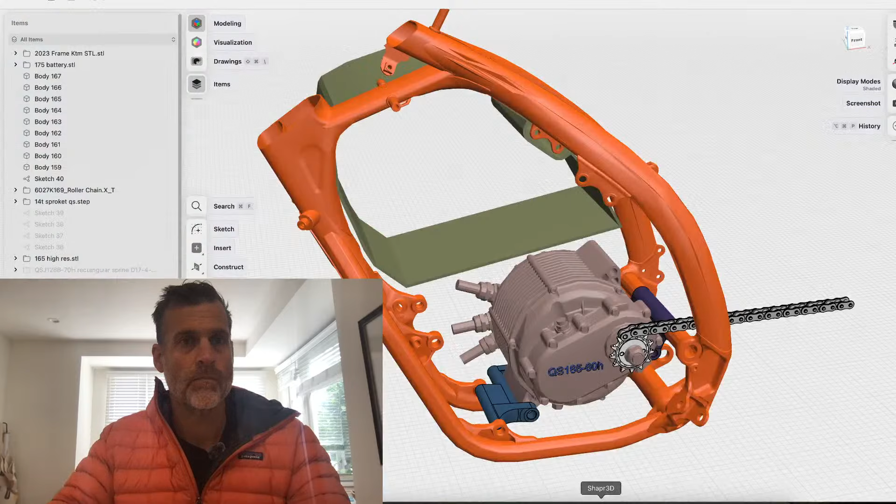So in this video, we're going to quickly go over a few things here. One is how to decide which motor is going to be good for your frame. And there's quite a few motors available out there. So let's go find...

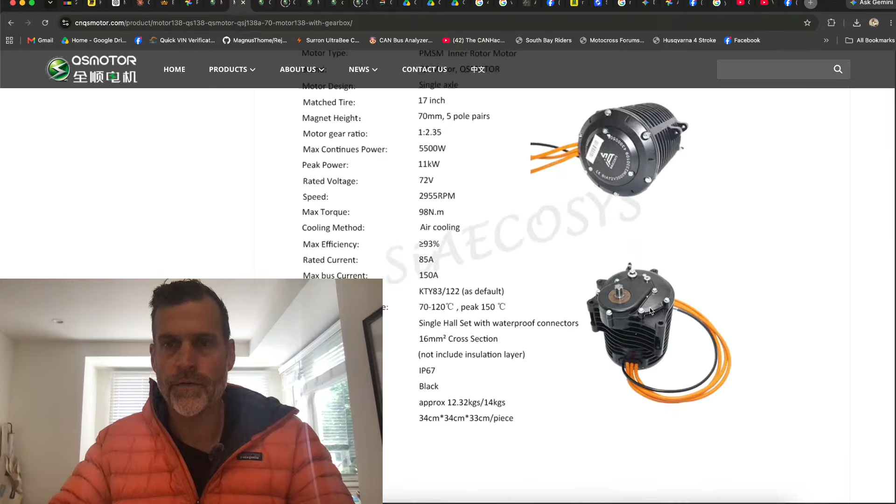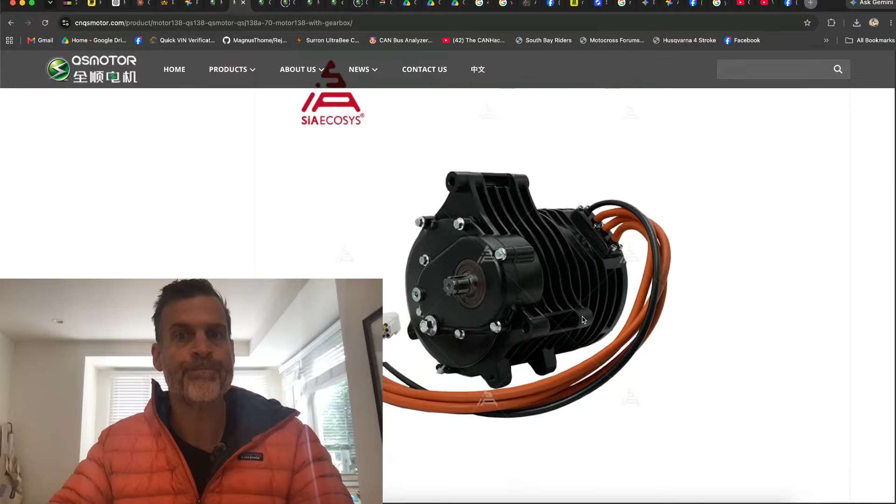So we're all used to this motor right here. This is going in damn near every electric motorcycle over the past 5 years. I can push 30 kilowatts for just a few seconds until it doesn't need to accelerate anymore, then it sticks at 20. Technically, if you overgeared it and went up a really steep hill, sure. At a motocross track, this thing works good, feels like a 125, falls on its face after 35 miles an hour. That's fine, but the problem is it gets really hot.

It is air cooled. It's about 12 kilograms. Do the conversion for that, 20-something pounds.

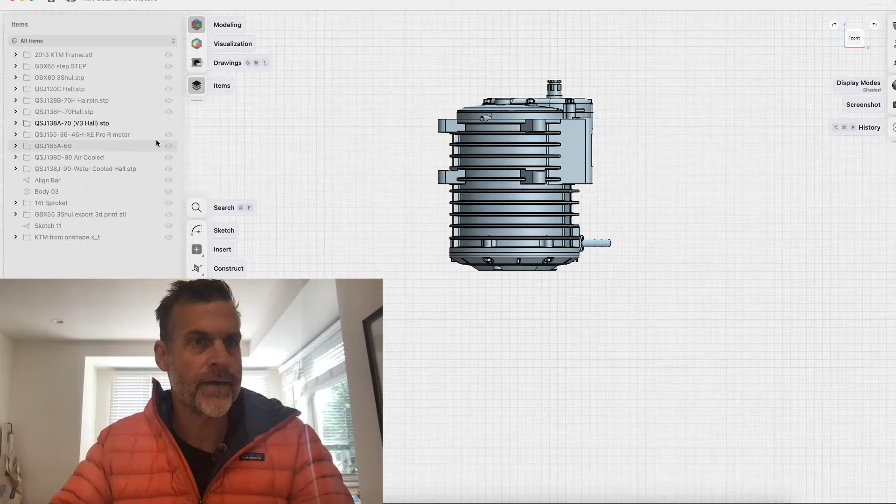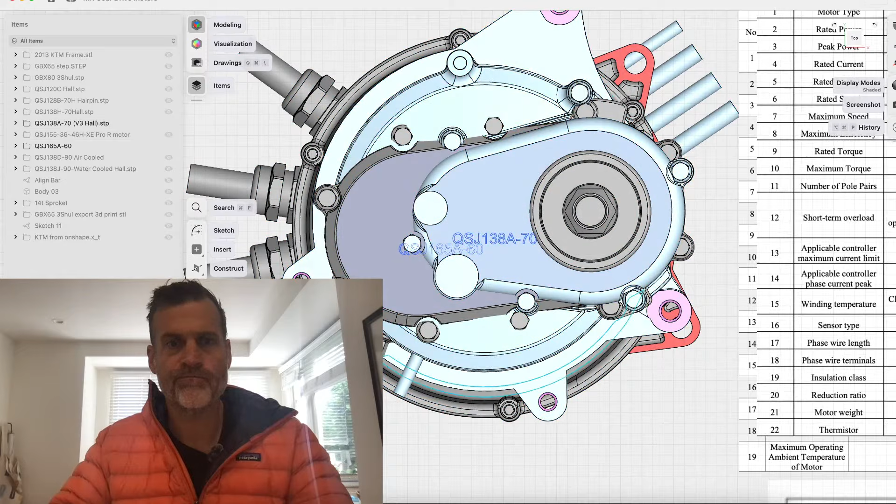So I'm going to give you a comparison now to a newer motor, the QS165. I'm going to overlay that here. As you see, it's a little bit bigger. Well, not a little, a lot. So 138, 165. Let's look at that from above. 138, 165. Darn near the same. The 165 is a little bit larger in diameter here. However, you can find ways to creatively bring it down closer to the frame in some cases.

At the end of the day, this 165 can do 40 kilowatts versus 30. It's rated for 12 versus being rated for 5. The weight, you add a few more pounds, there's more copper in there, more laminations on the stator. They also went with a larger diameter 20 millimeter shaft.

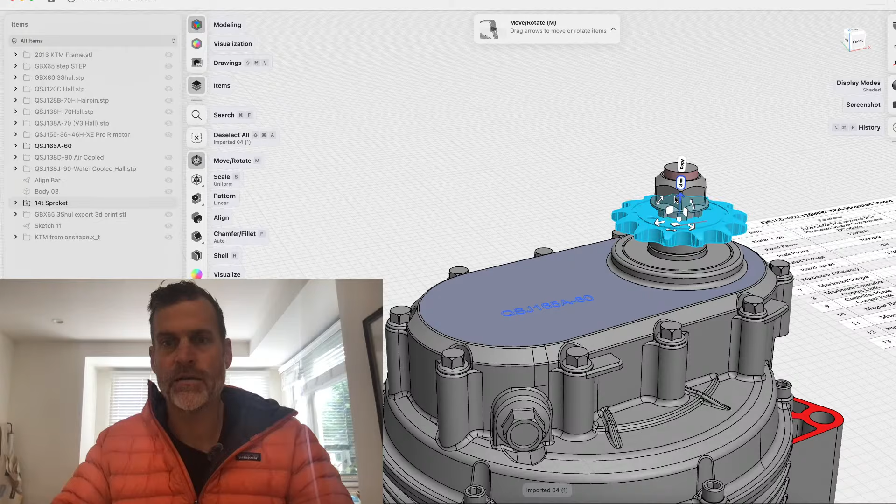This spacer right here, well, I can't move it up and down because this is one solid file. This spacer can be moved up or down. The sprocket can come up a little bit or down a little bit. It's up to you if you want to screw around with that. It's a standard spline sprocket. You can buy it from them in a 428 or a 520 pitch.

It's up to you. You can buy a Yamaha one on Amazon. There's other people that sell them. So here's the specs for that. I won't bore you with all the specs. We mainly just want to see the size here.

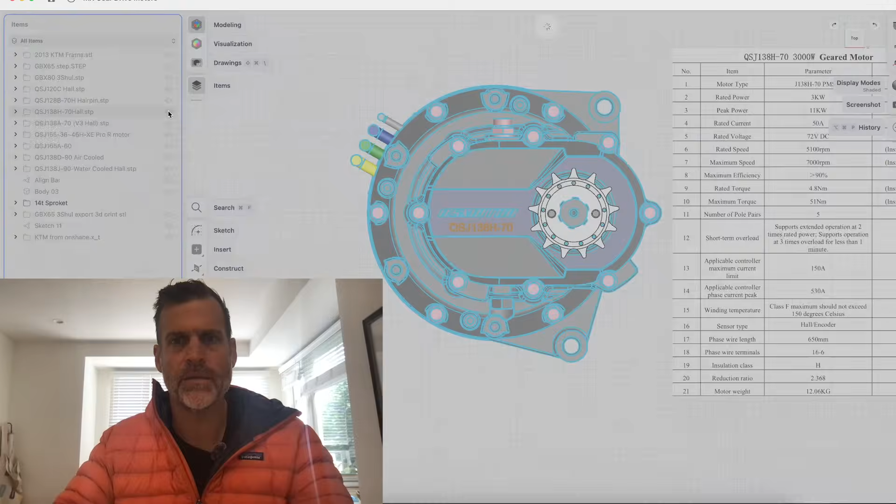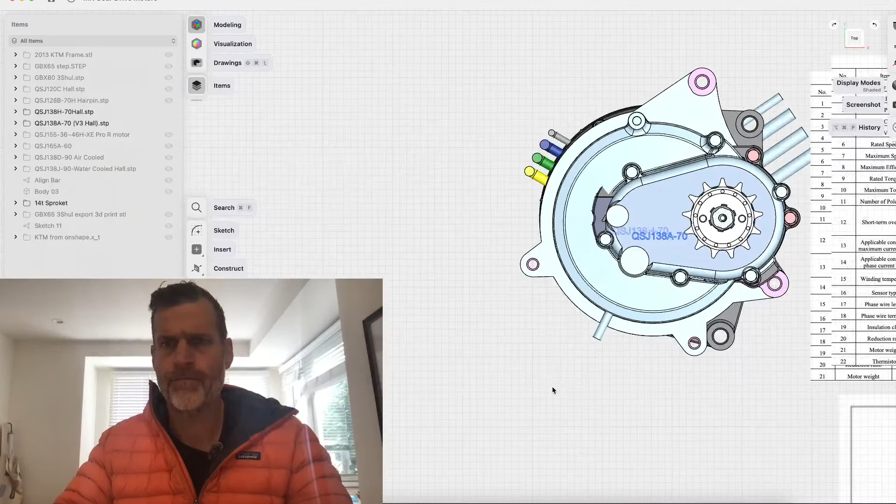So next I'm going to go in and talk about why, I'm not quite sure why no one is using this designation model here. The H, I kind of like this one. It's been out for a while. Russia market seems to really like it. USA market, for whatever reason, chose this one. Same specs. This is the same exact motor on the inside, same gear ratio, same spline, different mounting patterns, and different phase wire outputs. So interesting motor. I wish more people were using it.

So I'd love to see some people build with this. Maybe because it doesn't have a mount up here to the front, that you had to find a way to use it in the back. Perhaps that's why.

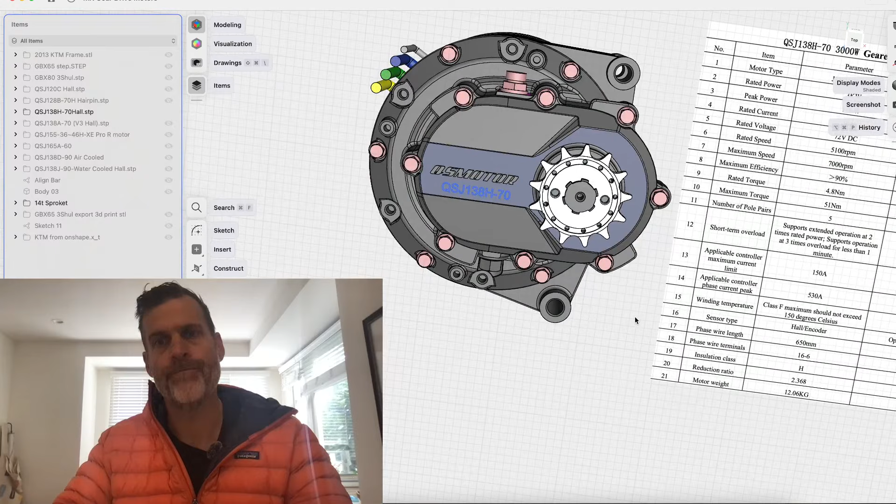But all right, let's go with the next. So I'm going to consistently keep the tried and true most popular one out here from a top view. Actually, let's go to how it's mounted in a frame. So typically this is how you'll see it mounted in a frame.

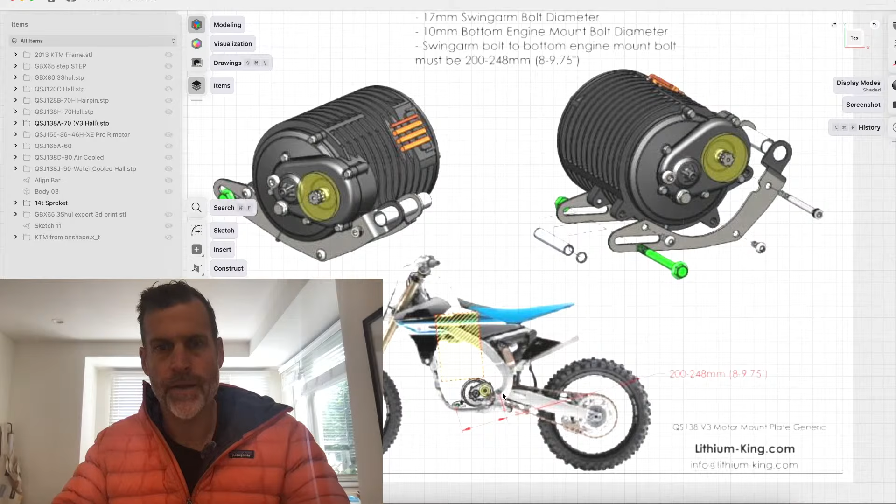It's a bad photo, I'll get you a better photo shortly. But it goes through the swing arm bolt right here to right there. You'll have to use spacers. KTM is 17, I believe Yamaha is 18. Then the front, you have to figure out a way to screw down. Sometimes you have to drill out the stainless steel. This is Lithium King, he makes these for everything, all the popular ones. Let's find his version for the 165.

Hello? There she is. So,

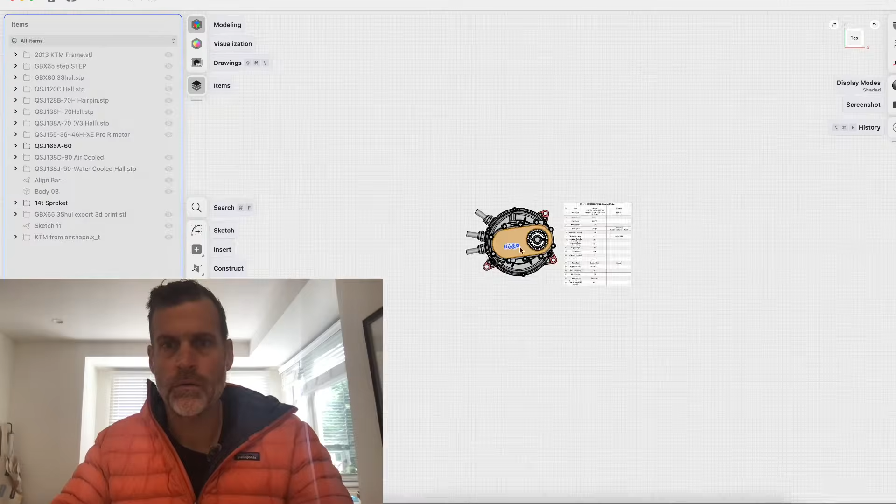I'm not sure, maybe I didn't add the image, so let's add it right now. 165 mount. Here we go, 222.

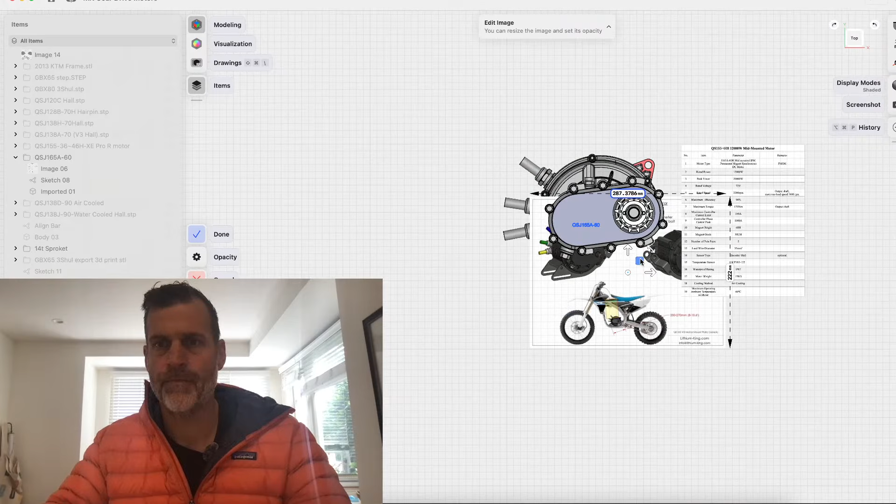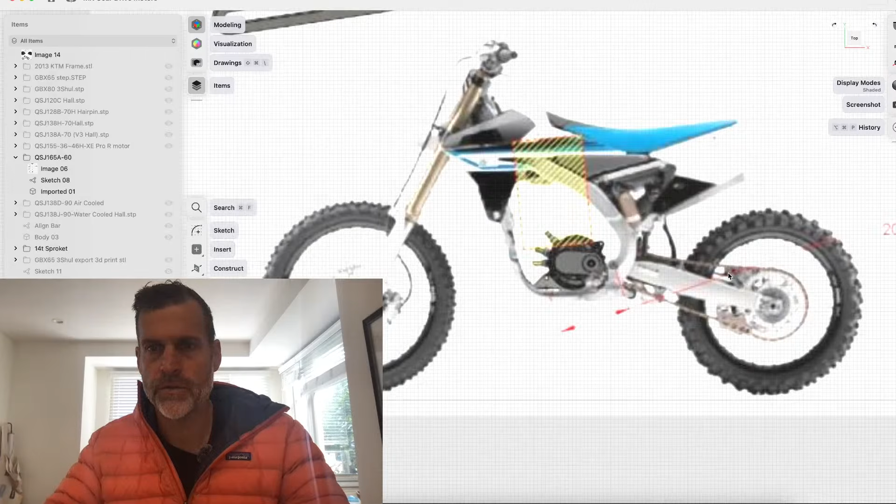Same thing, I don't think Lithium King likes giving big photos because they don't want people to steal their intellectual property and make renderings and cut their own. But same thing, swing arm bolt goes through here and you figure out how to mount the front. All right, on to the next.

So 138, goodbye. Oh my goodness, come on.

There we go, so 138, now let's overlay the new motors from 3Shul. These things are absolutely blistering, crazy, way more powerful and heavier, tiny bit larger.

So let's start with their 65. This is gonna whoop this one all day long. In fact, a little bit shorter, not by much, but shorter. And then they have their larger 80. So let's show this one right here.

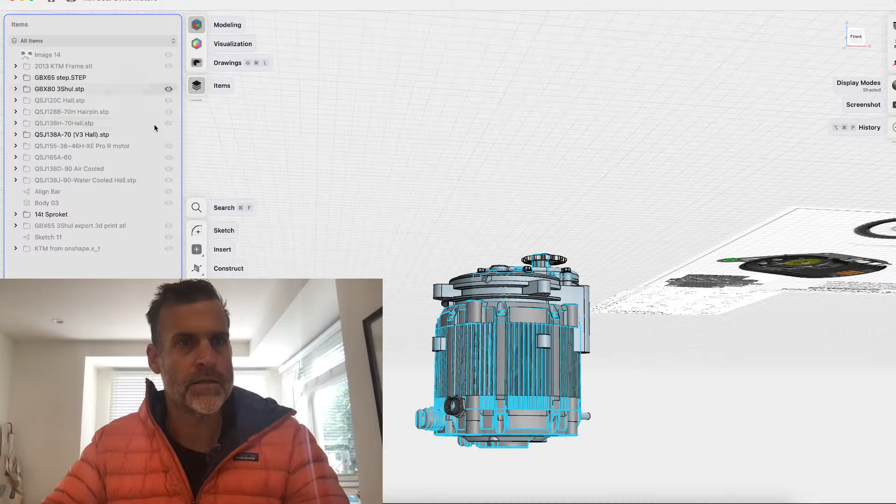So the 65 and the 80 are identical gearboxes, identical lamination sizes. There's just more laminations making it taller. So let's get rid of all that, I'm going to show you just the difference between them both.

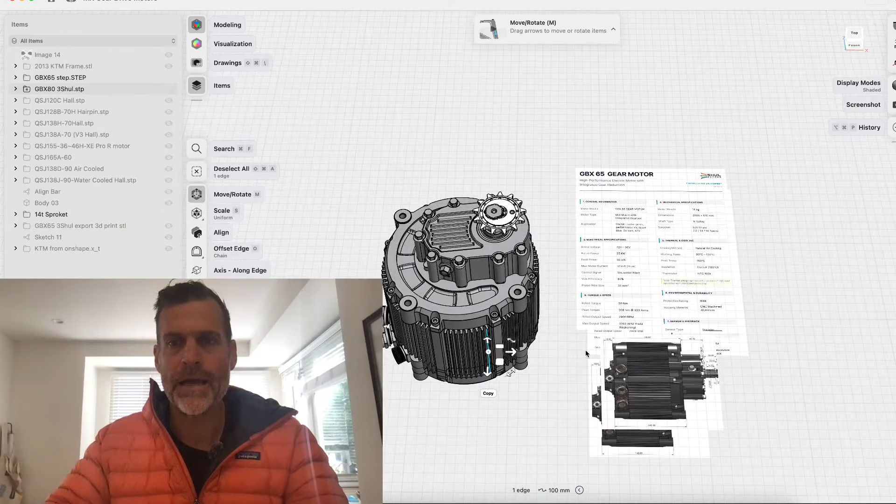Let's get a side view, perfect. So 65, 80, 65, 80. You see that extra little area between here and here? That is your extra length of laminations. More laminations mean more copper, more exciting power, and that's why they're able to give you some pretty insane specs on what they're able to do.

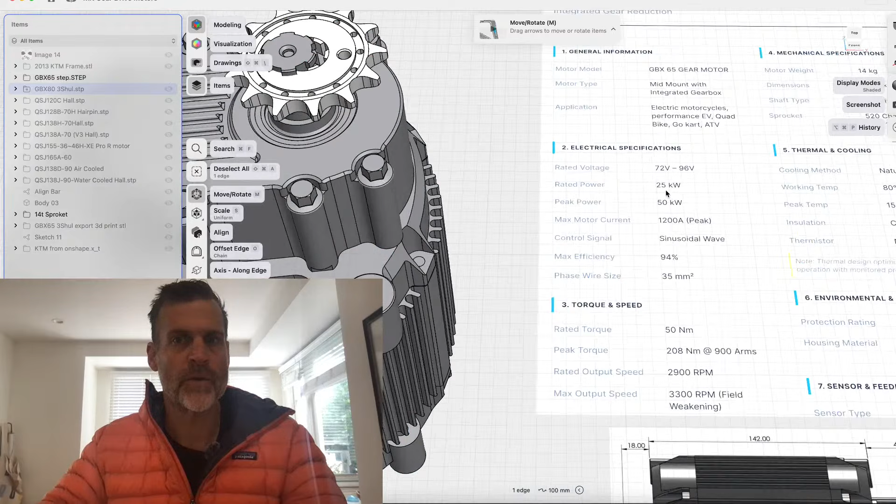Rated power 30 kilowatts, peak power 81. Who's doing 100 horsepower? Not me. I don't have a battery that big, but if you want to, cool. This would be a little more 450 power right here. 25 kilowatt, that's rated, that means it's good for a consistent 25 kilowatt, assuming you have cooling. 50 kilowatt, well over 60 horsepower, 70 horsepower, no problem.

They have their countershaft sprocket a little bit closer, which means you can push your motor closer to the frame. I like that, that's good. They don't have a bunch of weird mounting bungs sticking out in this area that get in the way of your frame and your swing arm pivot right here. You can still grind off a little bit if you want, if it gets in the way. Let me get rid of this sprocket real quick.

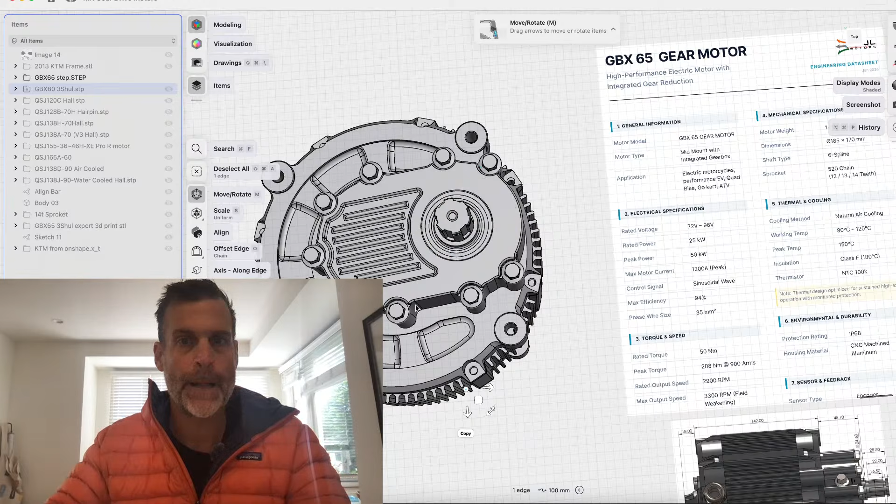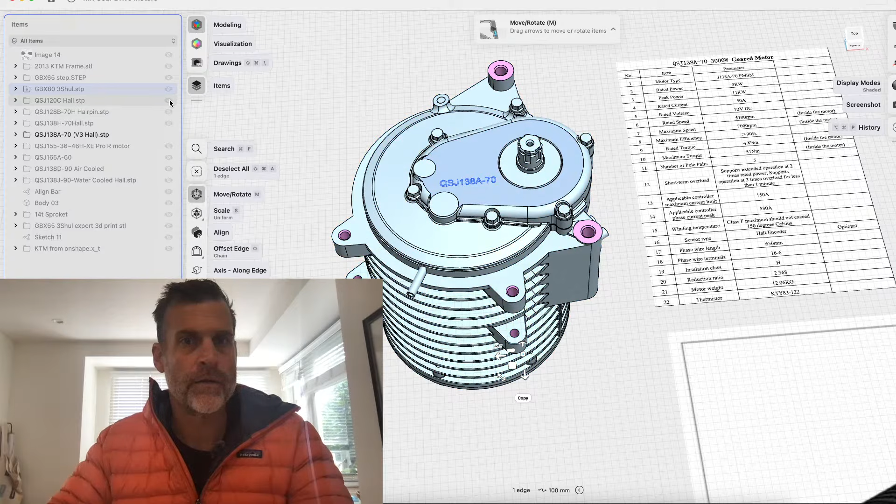All right, let's clear those out, go back to our baseline. All right, back to baseline, and for the fun of it, let's go to the 120 motor. This is what's on KTM 65 conversions, a lot of people use them.

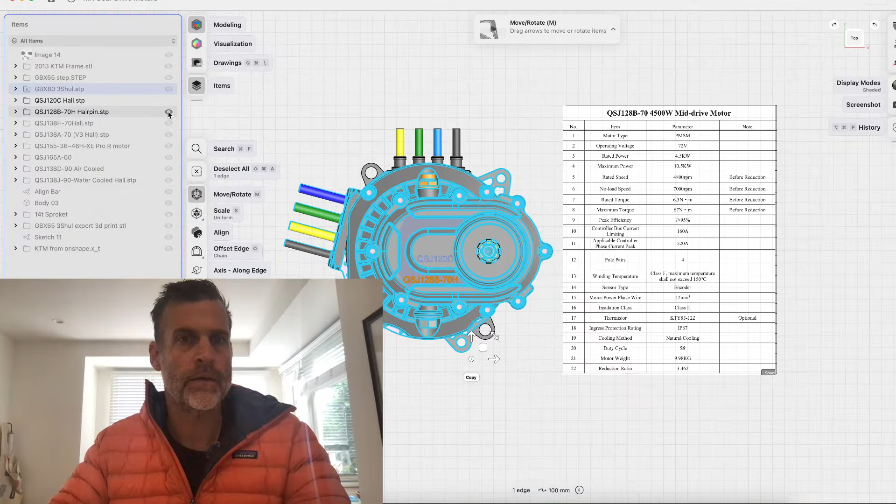Huge difference in size, this little guy is not rated for all that much, but it's just fun to see. However, look what they just made, a 128. So the 128 is the same gearbox style, however, the gear ratio changes significantly.

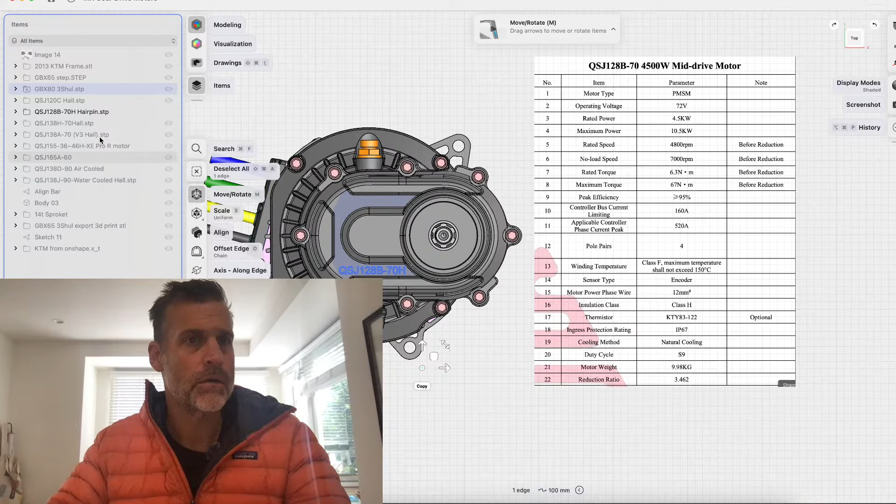Why they did that is kind of confusing to me. So these specs he just released to me, he said they're fine to show to all. Look at that gear ratio, 3.4 versus the standard 2.3 style.

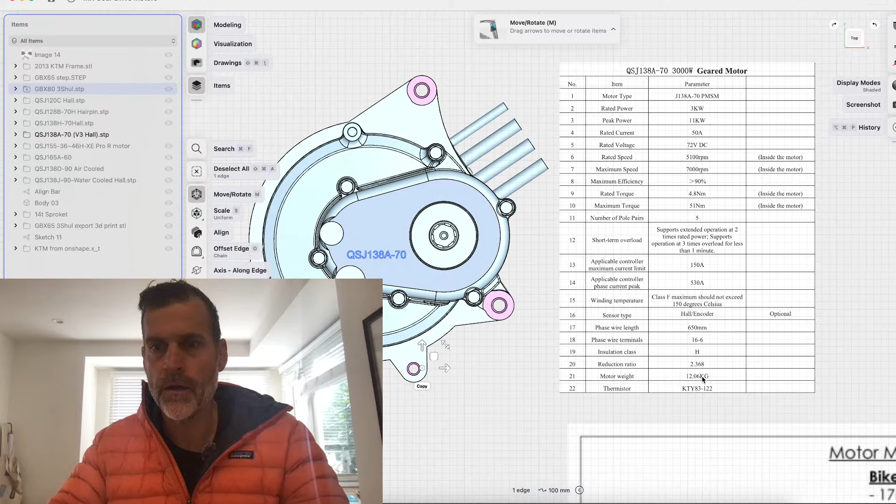So where's our gear ratio on this? I don't know if they list the gear ratio on this, but the RPM for this is basically the same as all the other QS motors. So we can just pick this one, which is 2.36. So the QS120, let's just pretend it has whatever gear ratio it does.

The 128, this thing's going to be a little powerhouse. This is a hairpin motor. Hairpin meaning it's got the goods to do. Where's hairpin? Here we go. So this is a hairpin motor.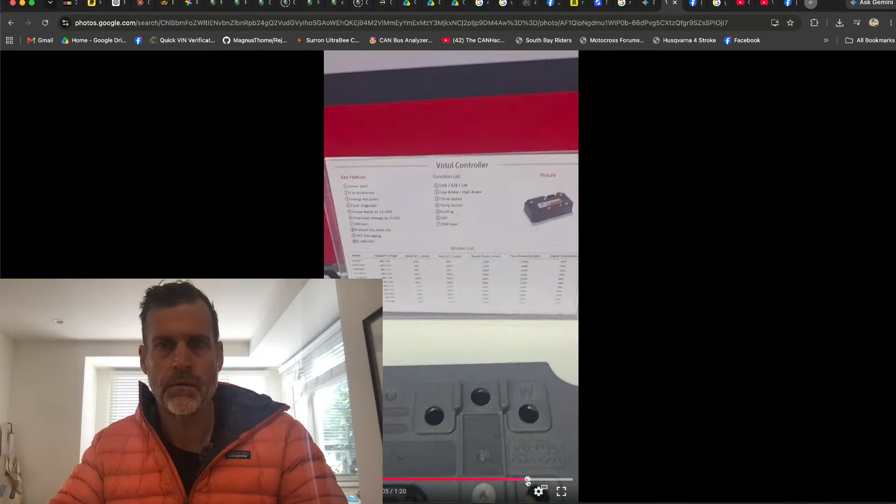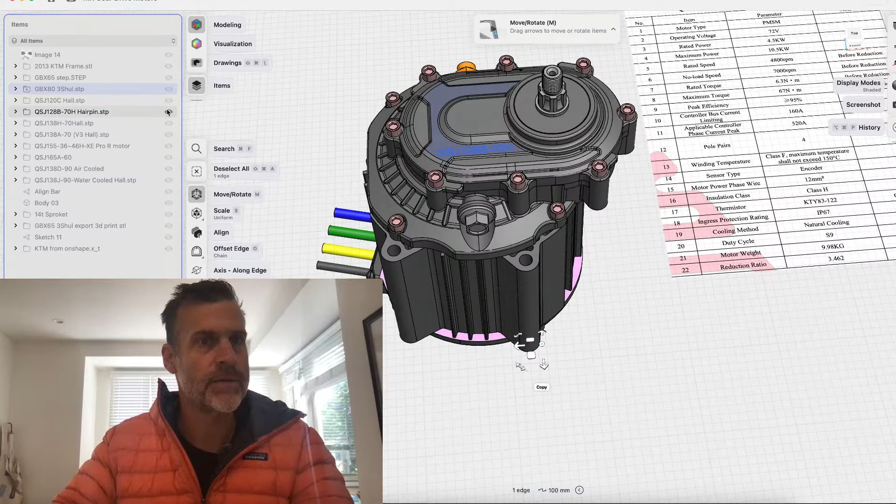But anyways, this thing's a hairpin, this thing is max 10 kilowatt, which means we'll probably be able to push 20 kilowatt. Super cool little motor, I'm actually going to try to put one of these in a full-size motocross bike. It's going to allow me to have some more room for the battery. Maybe it'll just be more of a trail bike. I'll see how it does on heat, limit it to 20 kilowatts and see what happens. So let's go back to baseline.

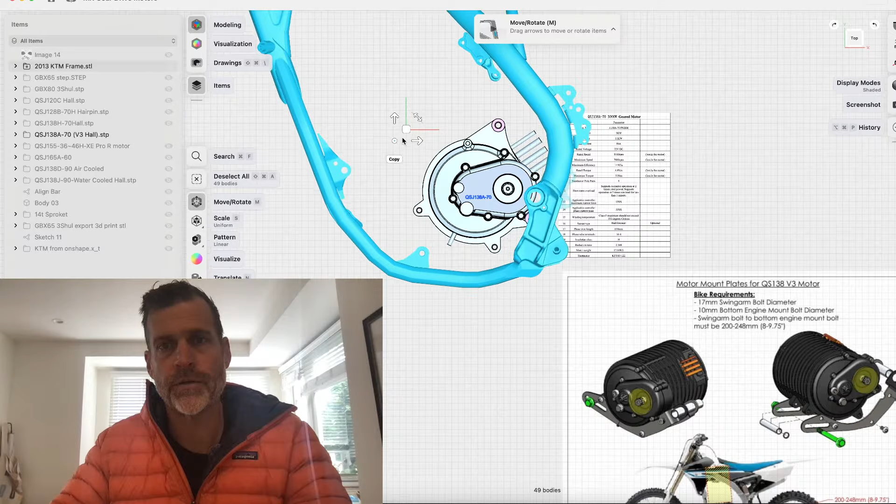So as far as mounting, what you want is to get this countershaft as close as possible to the swing arm pivot, not the motor being too low or too high, because that messes with your anti-squat. Typically what you should do is just prior to taking out your gas motor, make a template from here to here to here with some clear plexiglass or a piece of plywood, and just have a drywall screw going exactly where your original gas motor countershaft sprocket was. There's many other ways to do it. I use string or tape or whatever you want, or an old photo with some measurements.

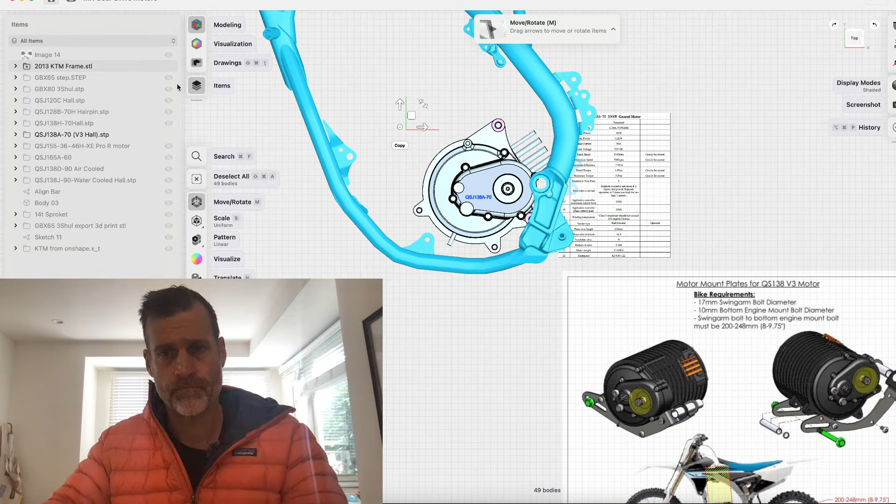Let me open an actual model with my frame scan. This is a 2023 frame, it's a 450. And I got two motors loaded in here. Well, while those are loading.

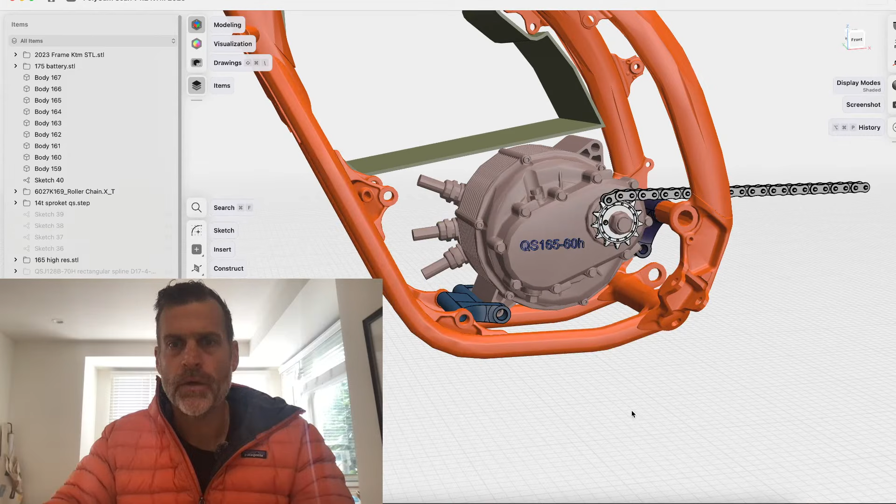This is loaded, so 2023 frame, this is with a 165 60H. These are some motor mounts I'm making here, you see in purple. The idea here is to just utilize the original frame members and tabs, so it's just literally direct bolt. This will be a 17 millimeter swing arm bolt, goes right through. This is a 12, this is a 12 I think, maybe a 10.

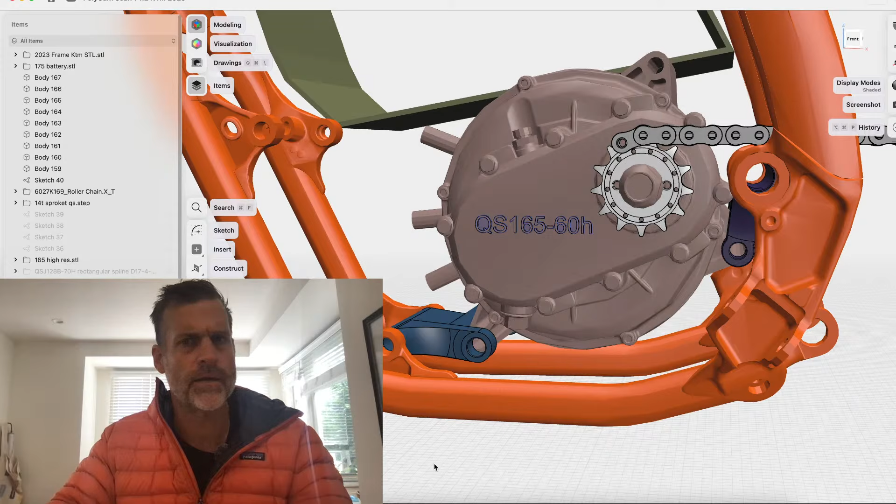Doesn't really matter, what's important is if you put your motor too low, then your chain will drag on the bottom of your swing arm. And that actually also affects, let's see if I have an anti-squat page still open, that also affects a lot of things like anti-squat. I'll put this link in the description.

So anti-squat, what you don't want is while giving power for your rear tire to lift up. On an off-road bike, if your countershaft sprocket's in the wrong place, you will put a lot of unnecessary load on your suspension. It's going to do some weird stuff, it's almost like if you've ever been late diving into braking bumps. Well, imagine you're just giving throttle and your shock is just bouncing up when it doesn't need to, or it's doing it more than it needs to. So just follow what you originally had. Your motorcycle manufacturer has been working on this hard for decades, so don't fix a good thing.

However, sometimes we can't fit these damn motors where we want to, so we have to deal with moving them around in different areas. Oops. Oh, come on, you little shit.

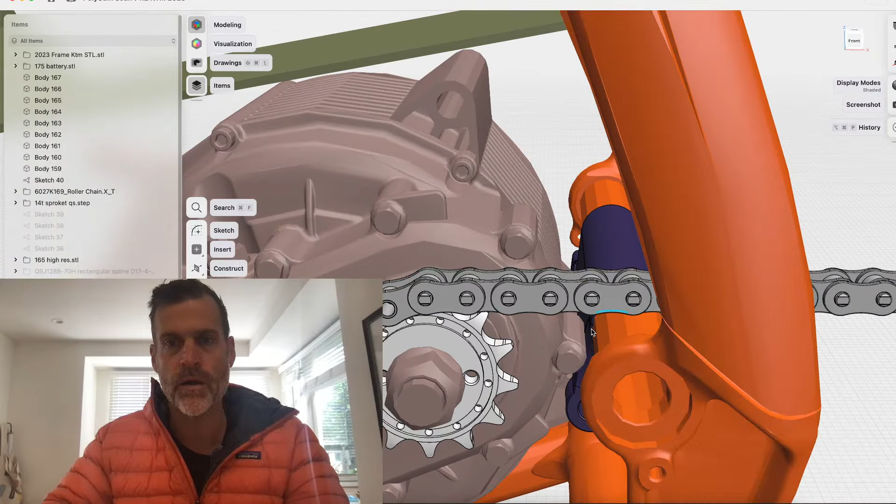What we have to deal with is the motors being in a weird area where we can't sometimes get it to where we want to go because this stupid bung is rubbing on this stupid thing. So in my model here, I have this motor way too close to the 17 millimeter shaft here because the swing arm actually comes out here, you got your needle bearings and all that. So this motor is technically too close, I do need to move it more this way. It's much too close, and that's my fault, I didn't 3D model a swing arm.

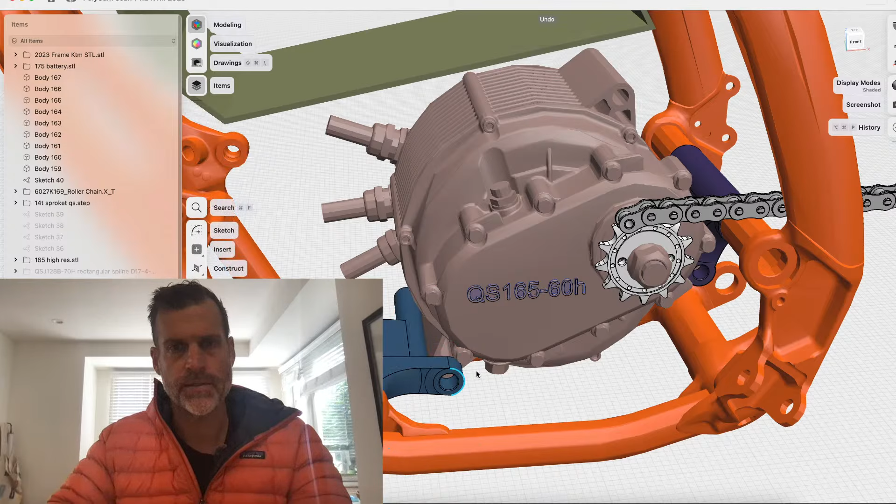So with that being said, these are motor mounts. I'm going to get these machined out of CNC aluminum, 6061. I've already done a mock-up, they work fine, this is just a bad 3D environment.

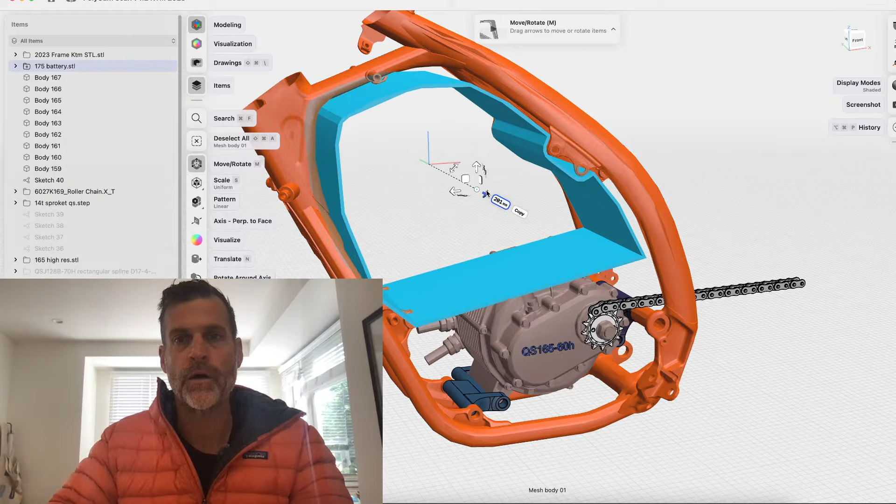Next thing, most people do cut these off and cut a portion of this off to fit a larger battery. We always want the biggest battery, but what we don't want is for it to stick out and rub on our knees, no one wants that. If you're an aggressive rider, that is the last thing you want. So generally speaking, you can fit 2 batteries wide here. This is about a 20 series 12P pack max you can fit in here, or a 26 series 9P pack.

That's using a pretty complex shape like this, which adds to the cost of the battery. You can just put a simple square in here, whatever you need.

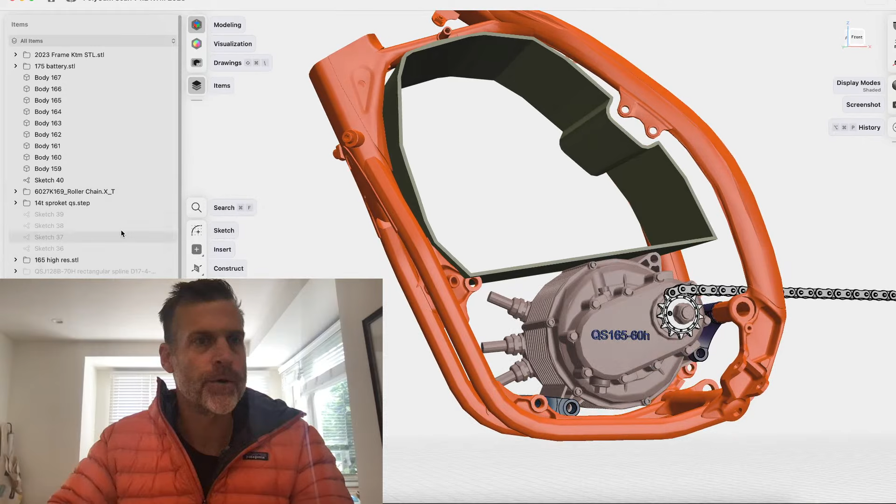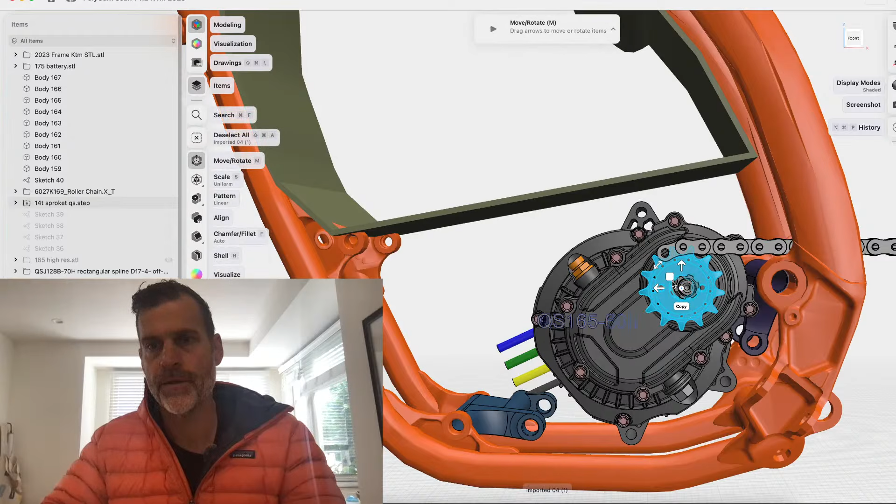So what I wanted to show you here is what happens if we put a different motor in. Let me get rid of this motor and try this one, just because I was curious. I really was hoping and want this motor to be something amazing. I'd be really excited if this thing ends up doing 22 kilowatts. Will it? I don't know. A hairpin motor doing 20 kilowatts when it's only rated for 5 is probably not going to be as resistant to heat as the others. But look at all the space we gain by the smaller motor.

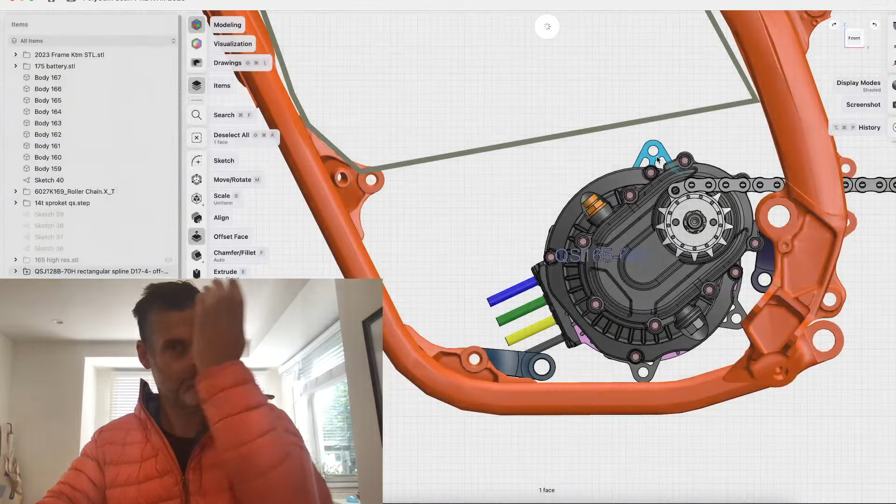I can chop this thing off here, but I can't chop it off here, I'll have to do something different. But I could chop this off here. Now look at the difference.

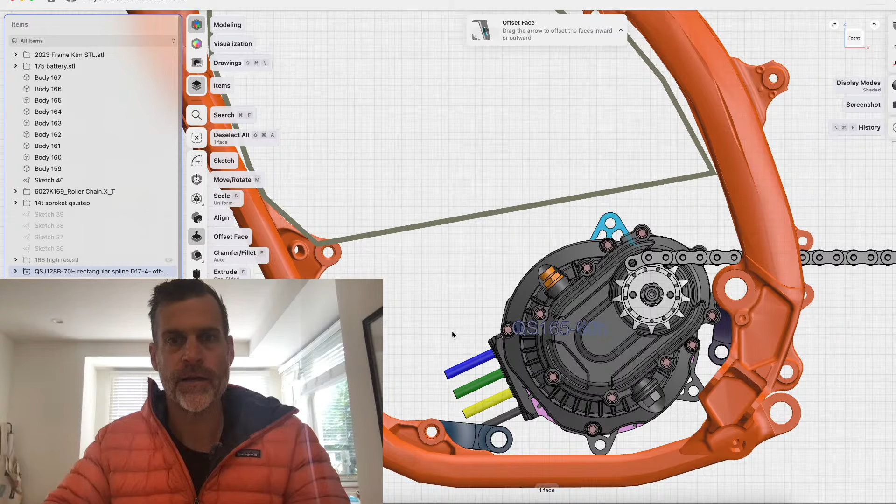That's a whole row of batteries I could fit right here: 1, 2, 3, 4, 5, 6, 7. And I want to fill up this area here with more batteries. Imagine all the batteries I get now.

I get to go down here, down here, down here, over here, and so forth. So all this extra space right here, this is an extra 7 miles of riding. So this is why space matters.

Plus this motor is 10 pounds lighter, so we save 10 pounds there. Maybe we end up making a smaller pack, like just a simple, cheap battery pack from one of the motor manufacturers. You can make an electric kit with a cheap motor, cheap battery pack, smaller controller, and end up 25 pounds lighter for a bike. You just have 2 of these battery packs, or maybe even a Surron Light Bee motor sitting around.

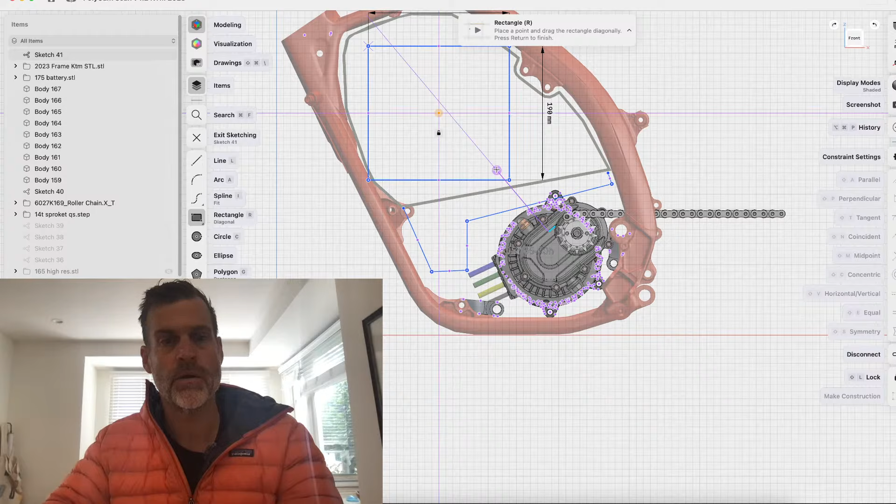The problem with this motor, however, is the RPM. The gear ratio is just bad, so you'll have to run 26 series, stuff like that.

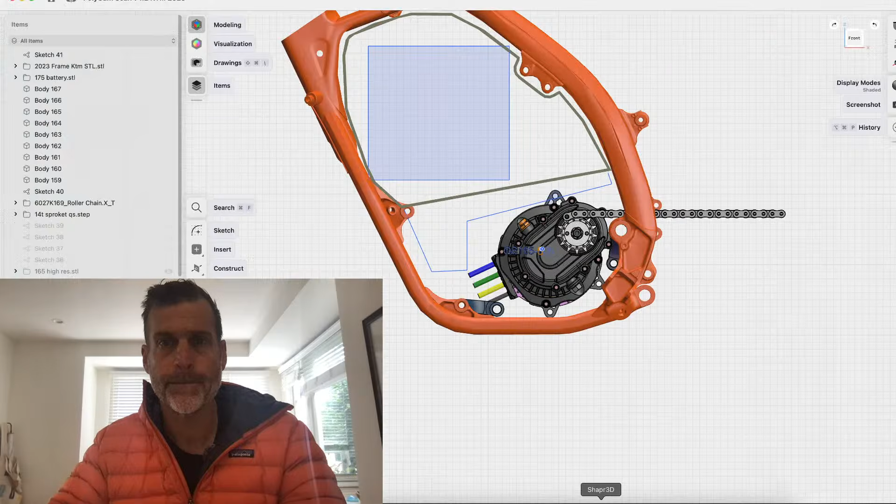How are you going to attach the motor mount? I'll show you right here. It's already taken care of. This swing arm, those are the spacers right there. So literally the swing arm bolt goes through here.

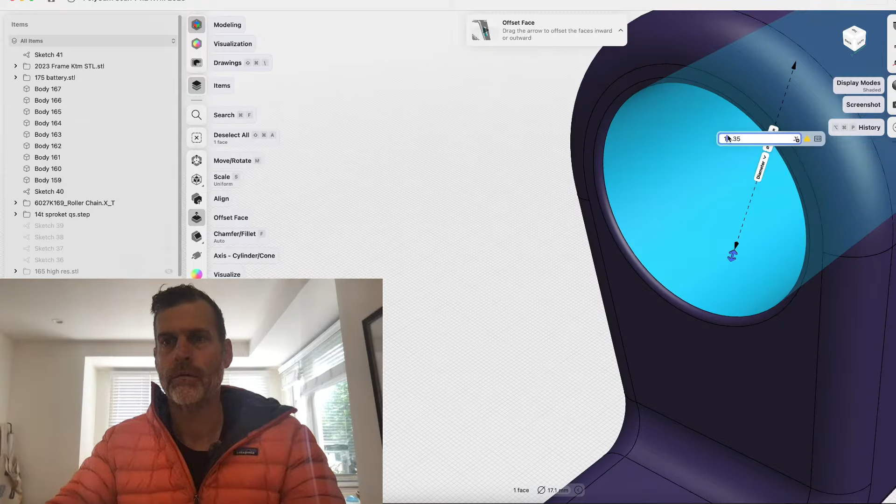That's 17 millimeters, I hope that makes sense. Say 17.1, so I gave it a little bit of tolerance. It could be 17.35 or something, doesn't make a difference. I could make it 19 or 10, so I hope that answers that.

So it's just going to be clamped in there. This frame can move 2 millimeters in when you torque it down, and that will sandwich.

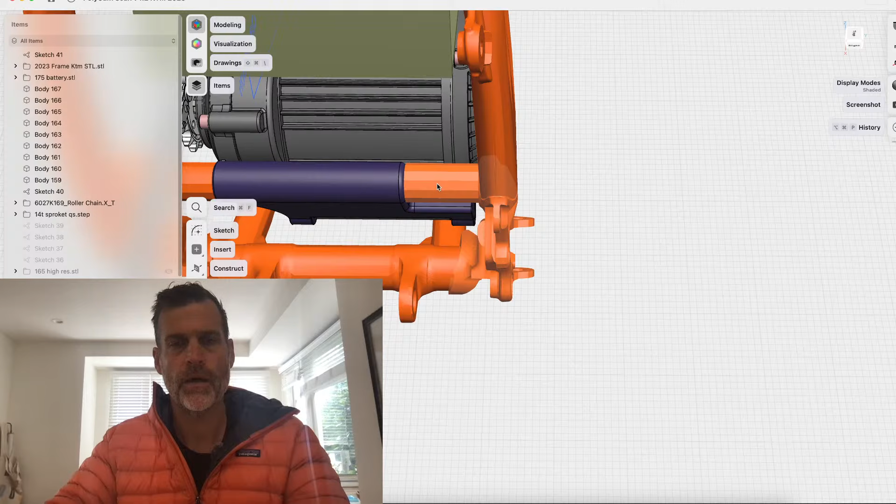These are spacers, sorry, this is a swing arm. These are the swing arm spacers that the needle bearings go around. So when the big 17 millimeter bolt goes in there and torques down, boom, that's held in very strong, squeezing, and then this squeezes against the motor as well.

So as far as where you mount these controllers, I've gone from putting them up in the airbox to mounting them exactly where the front shroud is. You get a constant airflow. They're already waterproof, the motor cables are just as routable, and these will fit right up there. You got to make a little bracket. You can also stick them in the airbox, really truly up to you.

And then let's find one other controller for you. We have the Electro and Co kit. What do you got?

So they use an EM260 on most of their stuff, and that's the Votol EM260. Now you can buy this anywhere you want. These are a little more robust. Their software sucks, like literally sucks. One of the hardest things to learn, even if you have a Bluetooth module, good luck finding an app that works with it. You got to use a WeChat mini program. If you don't know what WeChat or mini program is, good, don't.

So they sell a kit. Where did it go? That was weird. Electro.

So they sell a kit, they mark it up, they have their own custom bin file, firmware file in here, so they technically boost these up a little bit more. These run hot and will do fine hot, a lot hotter than VESCs. They're potted fully inside, waterproof, pretty bulletproof. Throttle control is decent, not too configurable. You get 3 mode switches, low, medium, high, that's it, but they work, they just work. And if you want a display, you use a little voltmeter. If you want a different type of display, you can use a standard electric, like many of these displays will work.

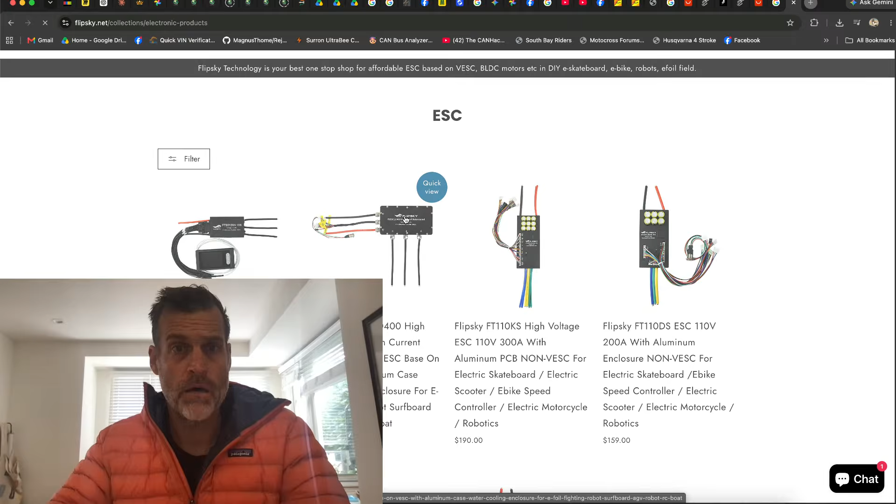All right, ESC, VESC. 20, Jesus, what is this one? Oh my God, what is this? All right, you got me. I have no idea, it's Flipsky. I'm still nervous, but that looks pretty cool. I'm not willing to test it out.

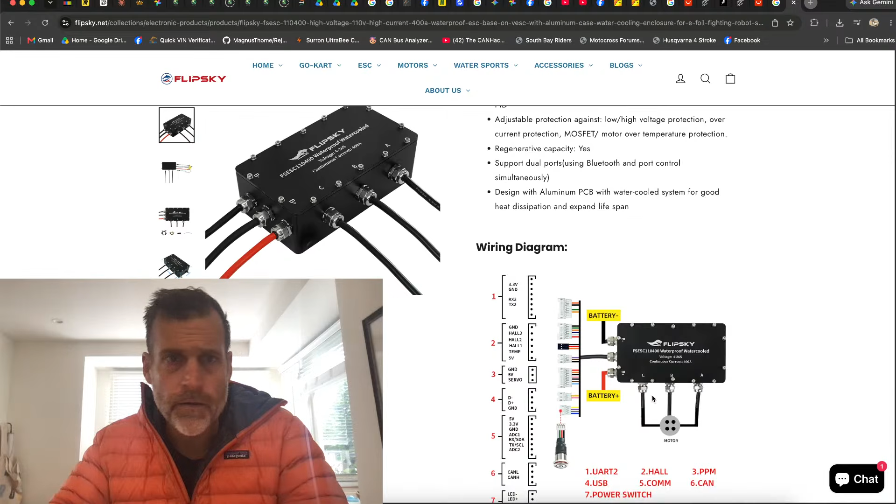$360, that looks okay, what is that? 6-gauge wire? Can't tell based off these M5s. Wire bungs. I mean, peak current 1,000, Jesus.

Now they generally and always go off of phase current, so their peak continuous current is 400 amp phase. So that's usually like 200 battery amps. This would probably be 350 battery amps. Not terrible, I'd say this is equivalent to a CL1000, but I doubt it. But cool, I don't know, someone try it out.

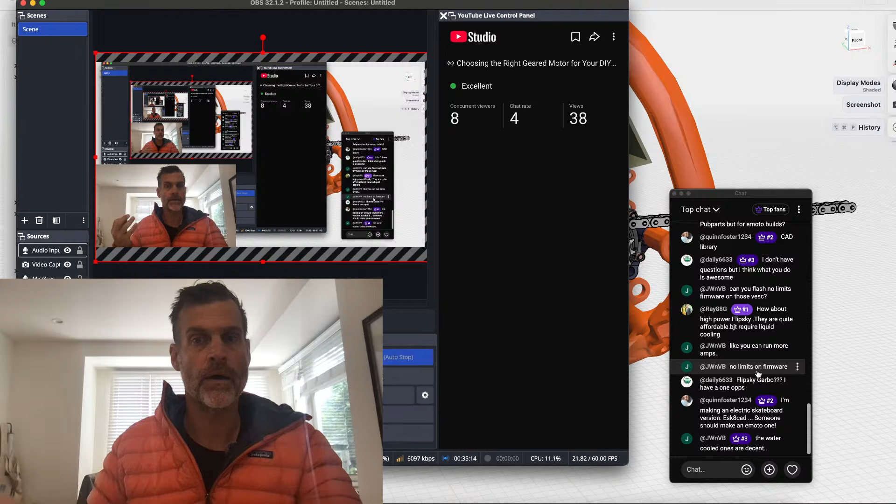Where are you? When you say, JWnVB, when you say no limit, yeah, you can, as long as every VESC manufacturer is supposed to supply their source code. That's part of the agreement with using all the hard work done by everyone prior to them. You're walking on the footsteps of your founding fathers there.

3Shul, very naughty. They don't ever fucking, I can't use that word. They don't ever give their full source code. You can ask for it, but it means you can't simply go in there and change stuff. But if the source code's available, you can absolutely change that.

Soak it in mineral oil and run the amps more, sure, but you're eventually going to find the limit of those MOSFETs or the MOSFET bank. So I would say no, don't do that.

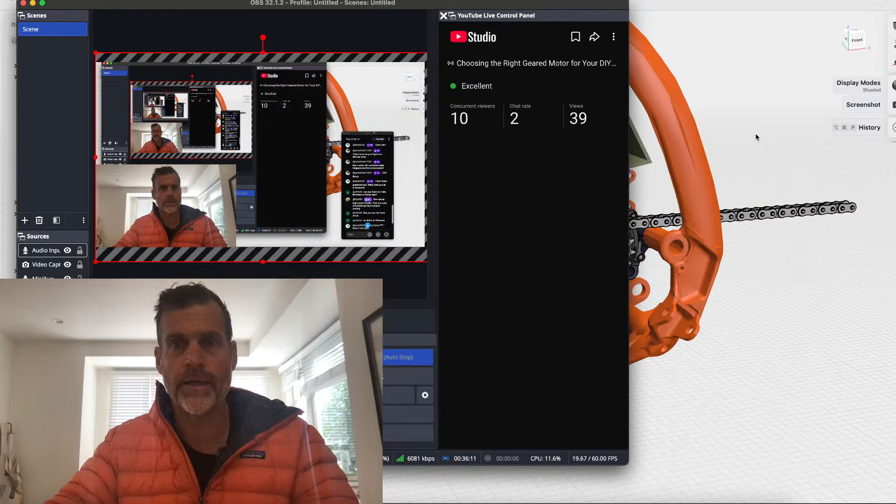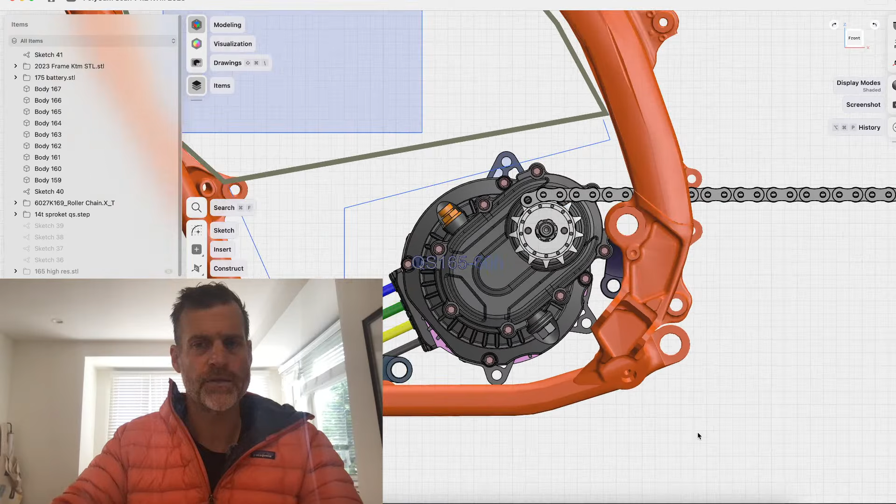But yeah Quinn, as far as the library, like I put a lot of work into making these. Like if I just open source this, and then spend all the time frame scanning, what's the point? I mean, I'm doing this to support, not gonna make a living off of this. But yeah, you're not gonna find many people putting this stuff out there totally free. That just doesn't make sense.

That's why Quasar, which is Manny, sells his kits. It's plug and play, very expensive. Quasar electric, can't spell. I mean, you want to see how much he charges? Let's see. All right, 85 kit.

$4,000, that gets you a battery. Oh wait, gets you a battery. So this battery costs, I don't know, 800 from them. This motor costs 200, that's 1,000. Noisy Cricket, that's 300 something, 400.

Not, but I mean, this is a lot of Lego assembly and a lot of parts. This costs a lot of money to build, but it is truly plug and play, and it is a whole cradle frame. So that's a lot of money.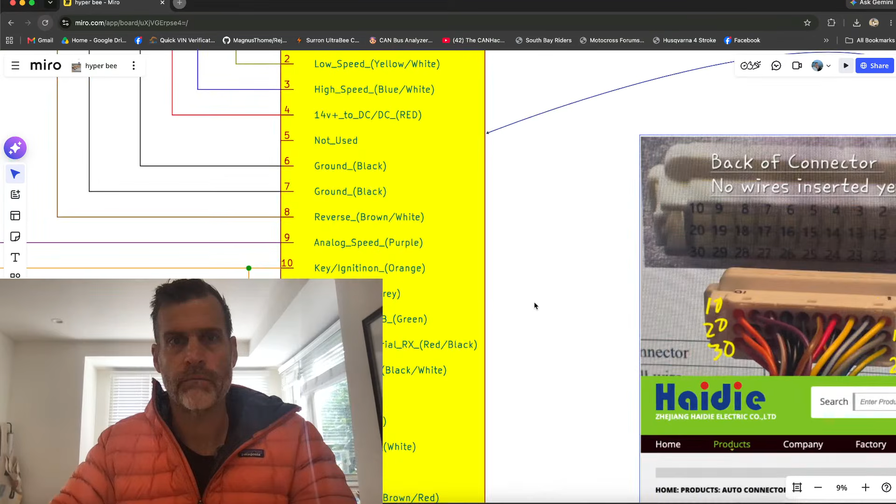But to have a place for all the wiring diagrams, schematics, blink codes, this and that - I had to build this all out by hand, every single one of these lines, what each one of these are. Background in electrical engineering, this is not hard for me. I didn't need to do this in an actual PCB design program.

This was a project that ended up not working out so well for the Surron Hyper Bee. They ended up coming out with an 8 kilowatt version. But my Hyper-B now has a 12 kilowatt controller in it, which is great and fun. But yeah, that's just a lot of work.

So you're asking, why don't we? Why don't we? Well, the age-old question is, who was we?

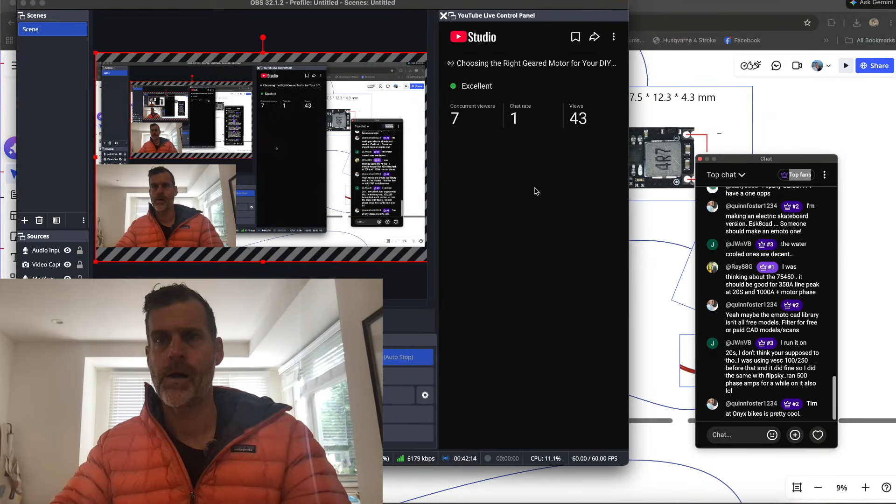All right, to those just viewing in, what we really went over today was all the different geared motors available in the world, suitable for motocross off-road bikes, because that's what I like. Plenty of direct drive motors, plenty of hub motors. Maybe next time I can pull in some guests and they can talk about their hub motors. I didn't plan on talking about controllers here, didn't plan on really talking about battery fitment and layout. We can definitely do that on another one.

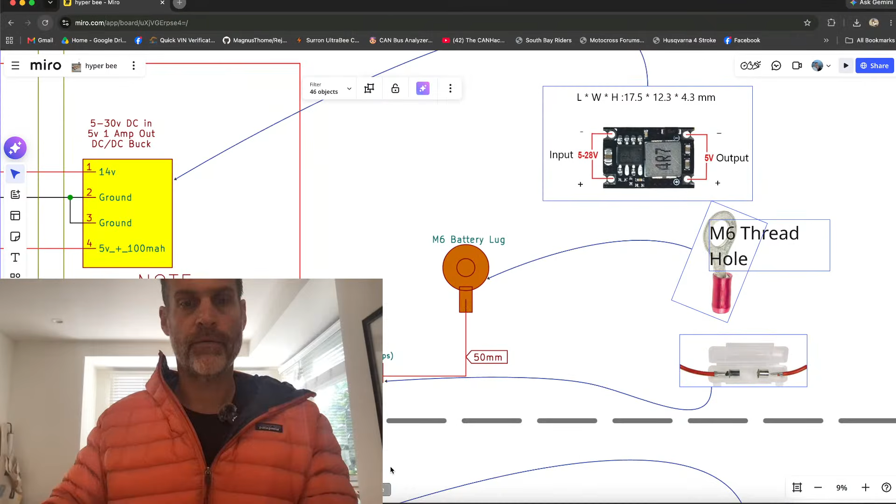With so much vibe coding, there are some really good web-based CAD layout battery programs now, which are phenomenal. One is Battery B - I'll just give everyone a quick, fun intro to that, a little tease. So let's open Designer.

Oh, this one sucks. Let's find another one. I'm worried this is broken. It was broken for a while.

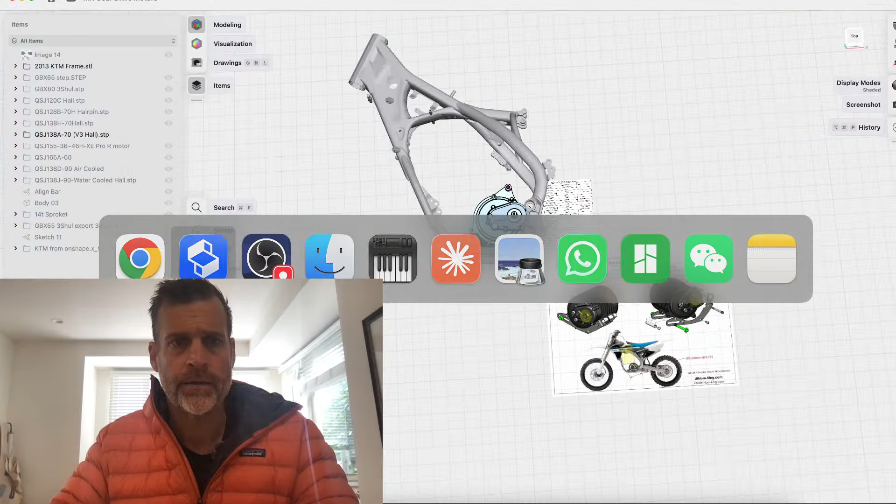All right, cool, this is my Hyper-B battery. Let's find - so I was able to, you can export your spacers for your battery, and let's see if I can go find my archive - Hyper-B battery.

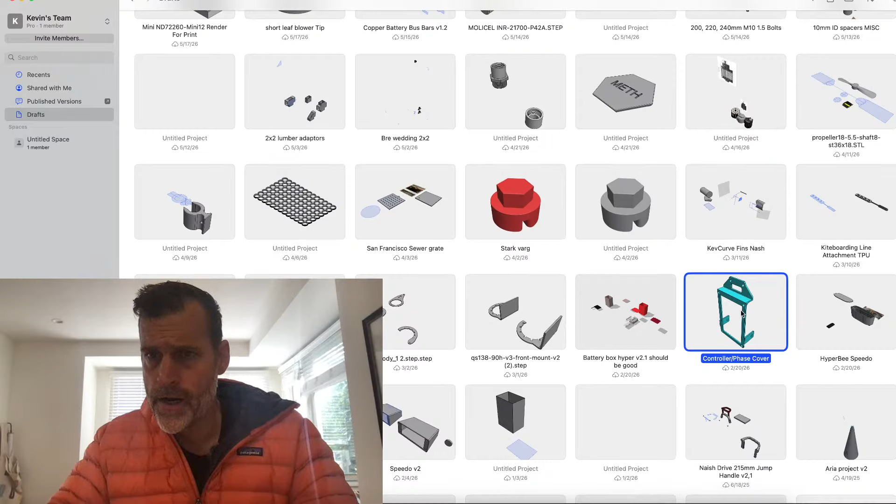No, I don't do that, that was just a funny thing I wrote. This should be Hyper-B, or one of the Hyper-Bs. This is the Hyper-B Fardriver. Here it is. All right, so for example, should I open source this?

Yeah, I mean, I can put it on Cults 3D and charge people $25 to download and print this, that's probably what I'll do. The Hyper-B display I made based on the ESP Waveshare display, for the case for it - I should charge $5 for that. The wiring harness that I get made in China for $54 per, when ordering 50 of them, I should charge $130 for, because you know that's what you have to do. It's not giving stuff away, it's not how the world works. It's capitalism.

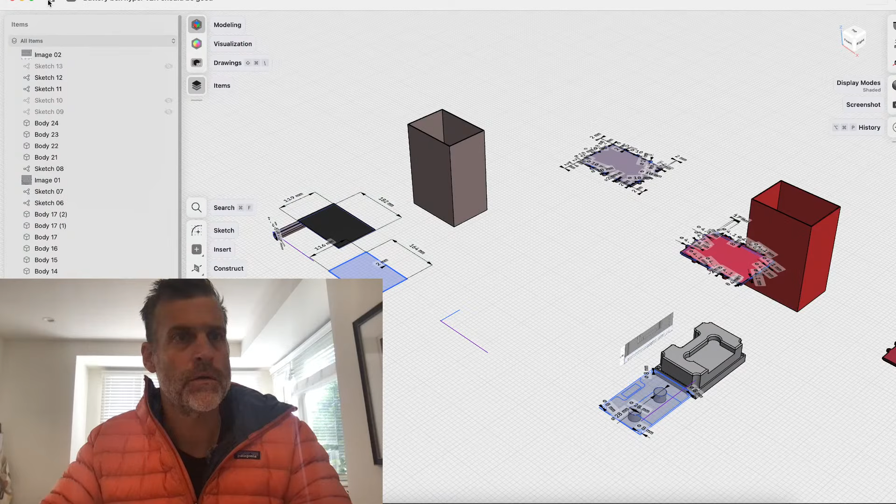So that's the battery case, that's Fardriver. So a lot of work goes into open sourcing stuff, and it's hard to just say, yeah sure, I'll do that.

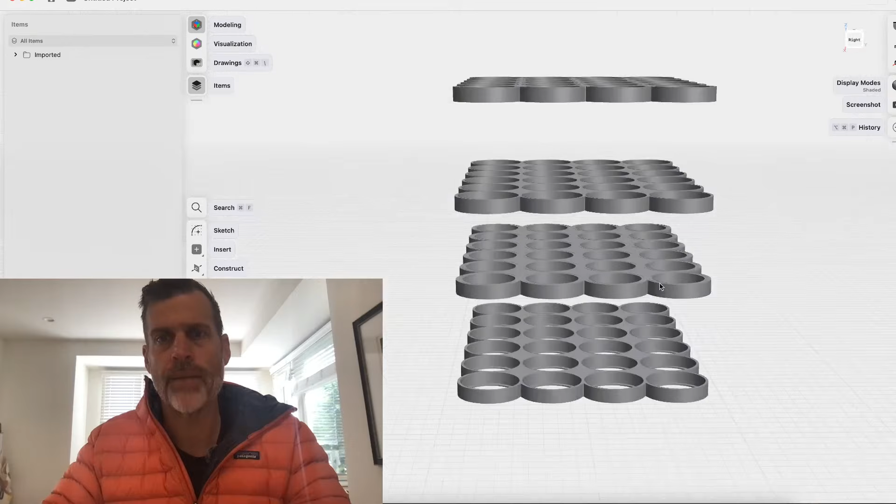All right, this is Hyper Bee, so these were the Hyper Bee battery spacers right here. I printed these out with a little bit closer tolerance here with ASA, just because of such a tight space in the Hyper Bee. Morgan didn't want to do this, but I do have a different manufacturer willing to print it out for me with closer spacing than the normal stuff they provide. As you see, that's a lot closer - that 0.5 millimeter on each of them did add up to where it wouldn't fit in between the cradle of the frame. But yeah, so this is Battery B.

They'll take care of everything, including the bus bars, if you do ask for them. Let's turn off the case.

You have to lay out the series and stuff like that, and then the bus bars will form. So let me get out of my diatribe.

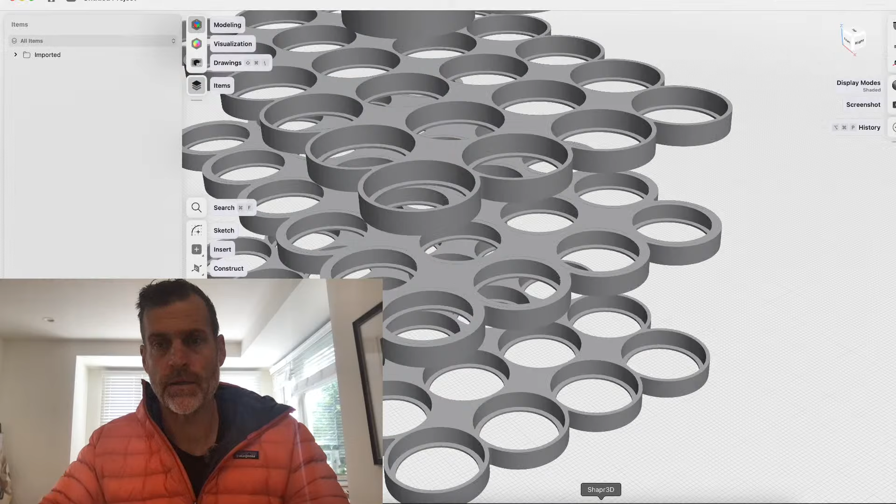I had the first FX throttle from Matt Hoover of FX throttles, who I think is fine. It was a really pretty looking single Honeywell Hall sensor in there, held in with hot glue - it's just hype. Grin Technologies, or one of these e-bike companies, has a really good billet throttle.

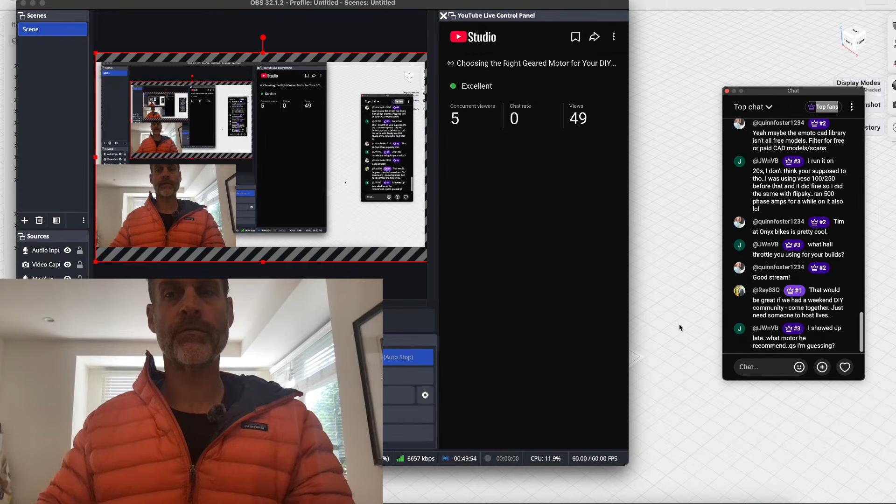For regen, I like those really thin finger ones, the scooter throttles. I tried the Dial, D-Y-O-L, and hate that thing for off-road motorcycles - it just bounces all over the place. Still my favorite regen throttle is a boosted rev. If you ever get your hands on a boosted rev regen throttle, it is perfect - absolutely, absolutely, absolutely perfect.

So yeah, the perfect motor is the one that fits in your project. Also one of the problems with these QS motors, the 138s, is they ended up sticking out a lot, so you had issues with your rear brake pedal.

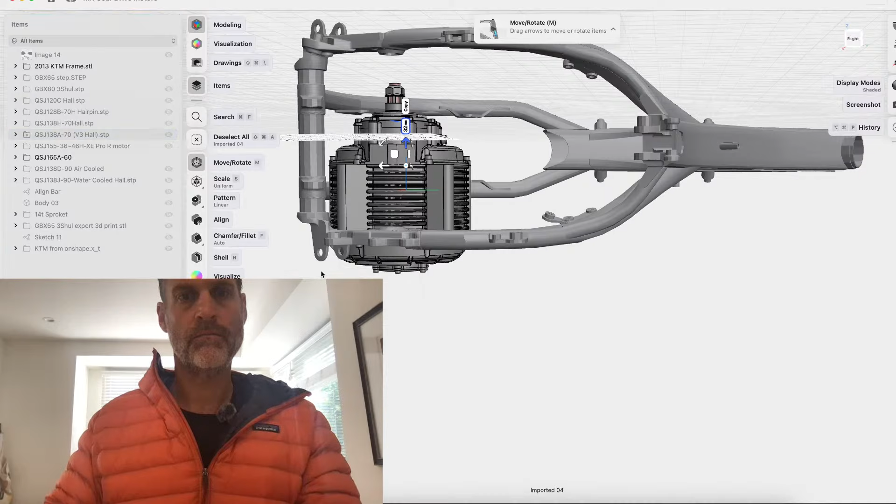To get the chain to align perfectly down the center of your swing arm - that's what was beautiful about using the 165, is it didn't stick out too much, remember your foot peg starts right here. That's what's good about the 165, it has more power, doesn't stick out as much, and you have a huge open area down here for your brake lever to stick out, where the 138 didn't allow that as much. That's my experience, I still like running a rear brake lever down there.

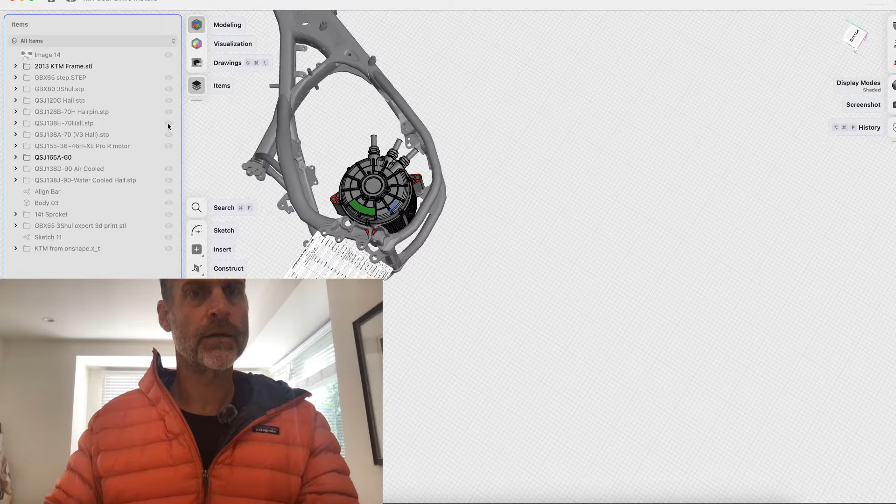So best motor for the value - my goodness, you can get these things for $250, these guys right here, from China, plus a little bit of shipping. The standard V3-70H, this is the most popular. You're going to see 10 builds for every one of the other.